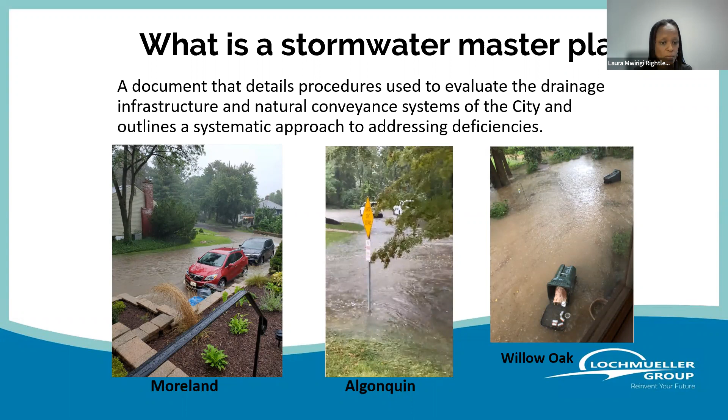So continuing what a stormwater master plan is, what does it actually do? One, it identifies the needs required to manage surface runoff, convey it through natural and built infrastructure, and discharge it safely back to the rivers and creeks. The city of Glendale is an MS4 as a core permittee with MSD. MS4 stands for Municipal Separate Storm Sewer System. That means that for the city of Glendale, the stormwater and the sanitary systems are separate.

Since the city of Glendale is a core permittee within MSD's NPDES permit, NPDES stands for National Pollutant Discharge Elimination System permit with the Department of Natural Resources, then there are some requirements that the city has to meet in order to remain a core permittee with MSD. This means that ultimately where the city discharges into a regulated system, discharge at that point is monitored to meet requirements of the Clean Water Act. MSD therefore cooperates with its core permittees to meet its requirements and manage stormwater runoff.

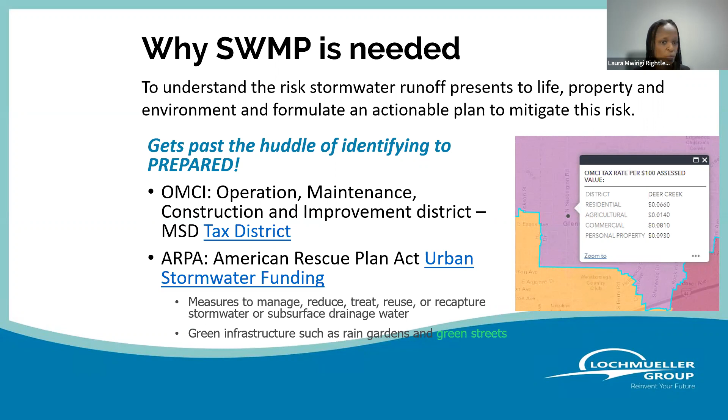We can move on now to questions. Do we have any questions, Alison? We do not have any questions at this time, Laura. Okay, all right then. In that case, we will move on to the stormwater master plan process.

This included Lochmueller developing a scope and fee, defining what the stormwater master plan would include, and submitting it to the MSD Deer Creek Watershed Committee for review. The Deer Creek Watershed Committee did approve the scope of work and fee, and that was presented to the MSD board. I believe it was introduced in June of 2021, and on July 8th of 2021, the board approved and allowed for an ordinance to be set up where the city of Glendale could enter into an agreement with MSD in order to be reimbursed for stormwater spending.

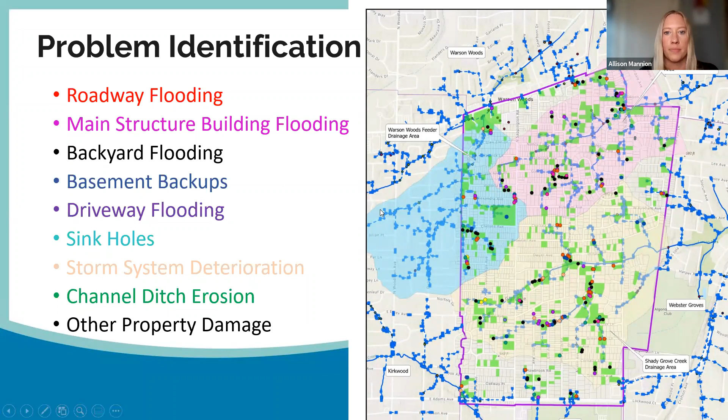So we were looking for roadway flooding, main structure building flooding, backyard flooding, basement backups, driveway flooding, sinkholes, storm system deterioration, channel ditch erosion, and other property damage. And like I said, the color of the text corresponds with the color of the data point in our map. And we were also out there taking some photos when we were out in the field as well. And I just want to go over some of the main problems we saw throughout the city. And the first one is roadway flooding.

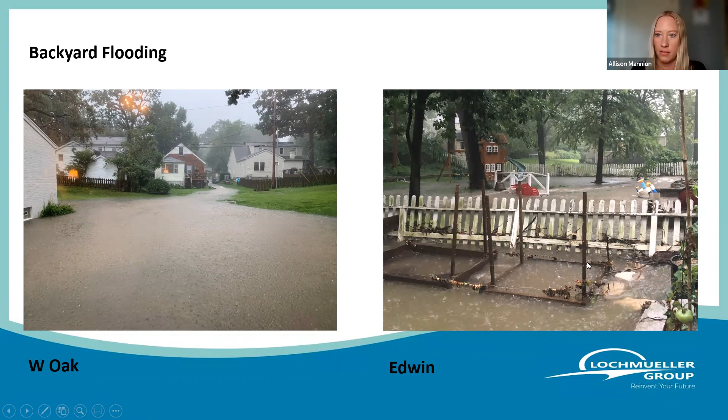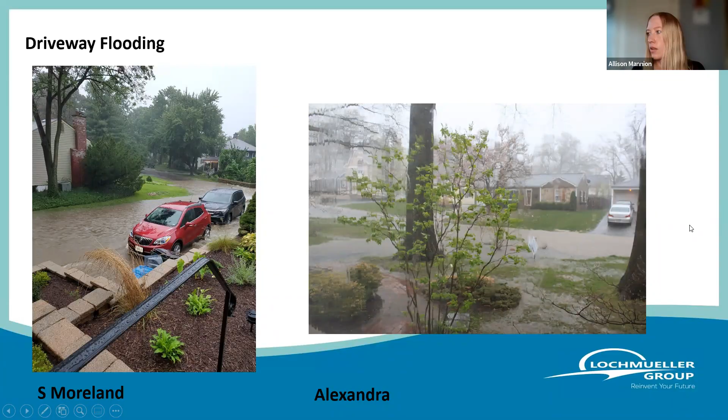Now we can take a quick break and do questions, and then I will start diving into the projects individually.

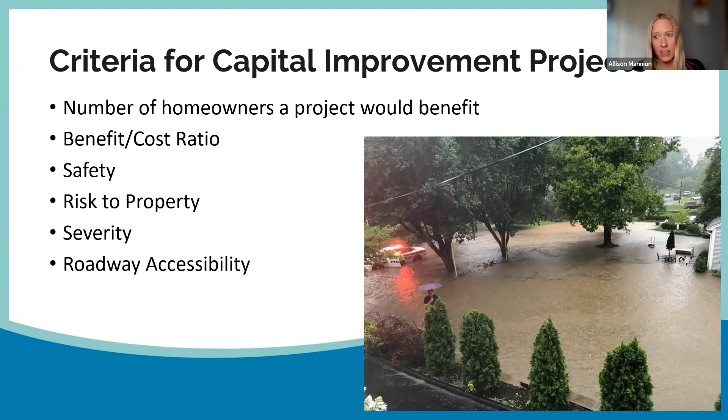So with these stormwater infrastructure projects, they're broken up into 3 types of projects, pretty much based on how MSD breaks up their projects. Those are improvement to the storm sewer collection system, storage, and stream bank stabilization. I'm going to now give you a little bit more information about what each one of these actually means. I'm going to start with the storm sewer collection system.

It could be open on 2, 3, or 4 sides, or it could be a graded inlet and flush with the ground. And the stormwater goes into the inlets, and then from there, those are the collectors, and then it's conveyed by the storm sewers in channels in the stormwater system. And improvements to the storm sewer collection system are needed in instances of flooding, of surcharged sewer system. So if there's not enough capacity in the sewer system to handle the stormwater, and roadway ponding if there's an insufficient collection in the area.

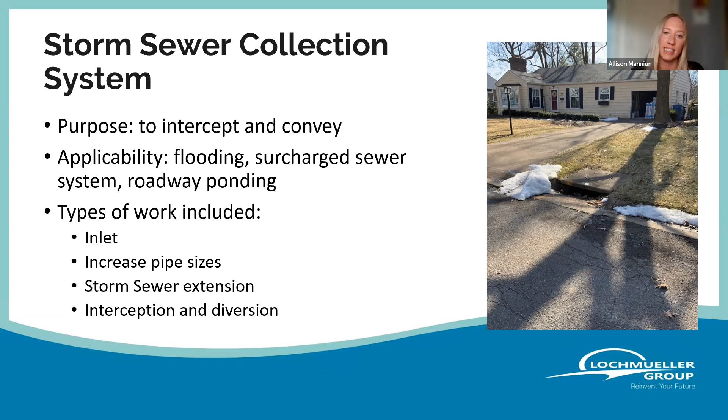And interception and diversion, and that would be used in an instance where the storm sewer in one area has less than sufficient capacity, and storm sewer in another area has additional capacity to take on stormwater, and so we would intercept and divert the stormwater from one area to another.

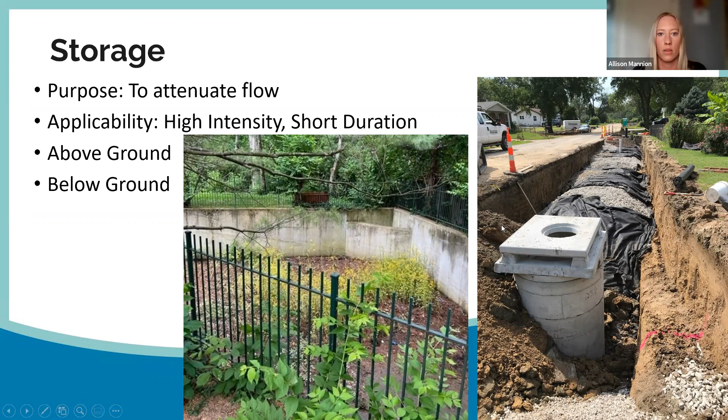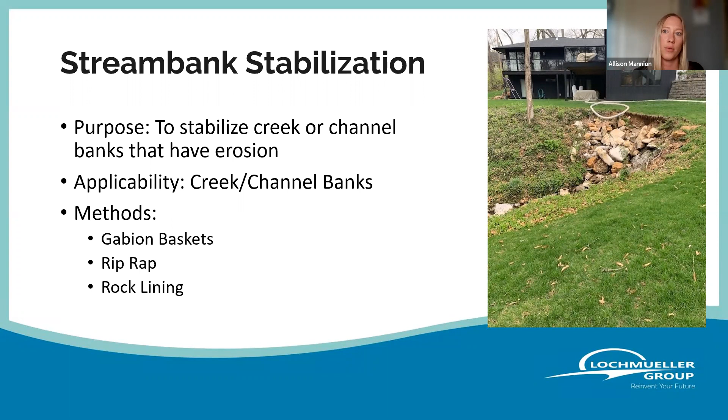And the last type of project is stream bank stabilization. And the purpose of these is to stabilize a creek or channel bank that has been eroding. And the methods of these include gabion baskets, riprap, rock lining. This photo shows an area within the city where this channel bank has eroded further and closer to the house structure. And so a main concern here is obviously the safety and property damage potentially caused by this eroding further towards the house structure or a road or something of that sort.

So now I'm going to start describing all of the projects. Before I do, I want to let you guys know that these are recommended projects. Right now, this is a draft phase of the Stormwater Master Plan. Nothing is finalized. Just because I discuss a project does not for sure mean it's going to happen. We are not done coming up with projects. And also some of these projects are shorter term projects, and they can be completed within a much shorter time period, and some are longer term projects. So those have maybe a bit more of a design component, or we will have to seek funding for that project. And to determine the opinions of probable cost for these projects, MSD pay items were used since this is MSD infrastructure.

And the projects were broken up into groups. The first tier, they meet all the CIP criteria and all the Stormwater Master Plan criteria discussed on previous slides. The second tier projects are considered for this master plan, but do not necessarily meet all of the criteria, but they do meet some. And projects that were not considered did not meet the Stormwater Master Plan criteria.

And here's a list of the first tier projects. They're not listed in any particular order, and I'm going to go over the projects in no particular order. These are not prioritized. They will be, but as part of the draft phase, we've not prioritized these projects yet. And these names probably don't mean that much to you. Again, we'll go over them shortly. And the second tier projects are listed on this slide. Again, in no particular order. And the project number at the end, that was just for our identification purpose. Again, that has no weight on the project.

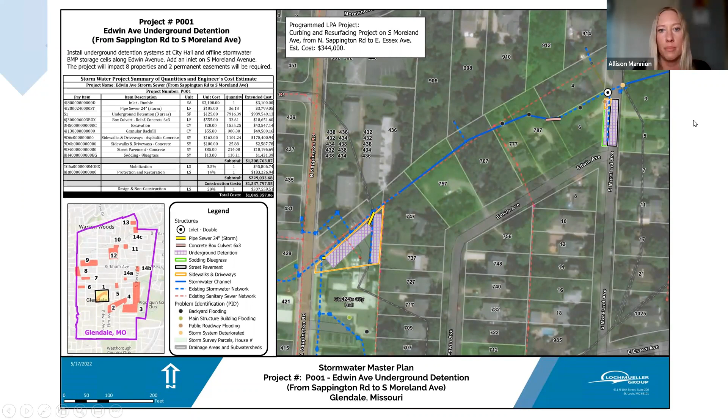The next project is Parkland, Elm, and Algonquin Stormwater Storage. This similarly recommends some underground storage along Parkland, Elm, and this paper street between Algonquin and Devon, as well as between a few of the houses on Parkland. This area from Cliffside through Algonquin, Devon, up to Parkland and Elm, all along this network of storm sewers, they are experiencing some flooding issues.

The stormwater storage will help store some of the stormwater. That will help that immediate area, and that will help downstream. So all of these areas of recommended storage are going to help this area and also further downstream by not overwhelming the stormwater system downstream. This project will benefit 217 properties and has an opinion of probable cost of $7.4 million.

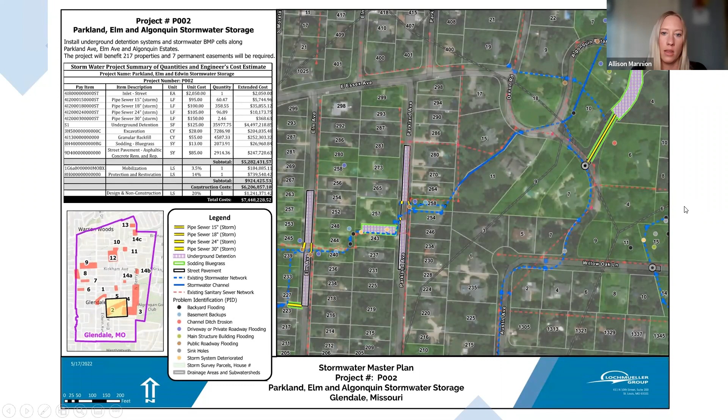The next project we are discussing is Willow Oak Diversion Sewer. Currently there is a network of storm sewers that goes south kind of parallel to Berry, and they end at a sinkhole between 15 Willow Oak Lane and 6 Kings Pond. This project is an interception and diversion project. So we are recommending to take the flow of the stormwater out of this system and take it down to Shady Grove Creek. Another option that might be considered during the design phase would be to take it over to the golf course and add to the storage pond, or look at another pond in the golf course. This project will benefit 33 properties and has an opinion of probable cost of $5.1 million.

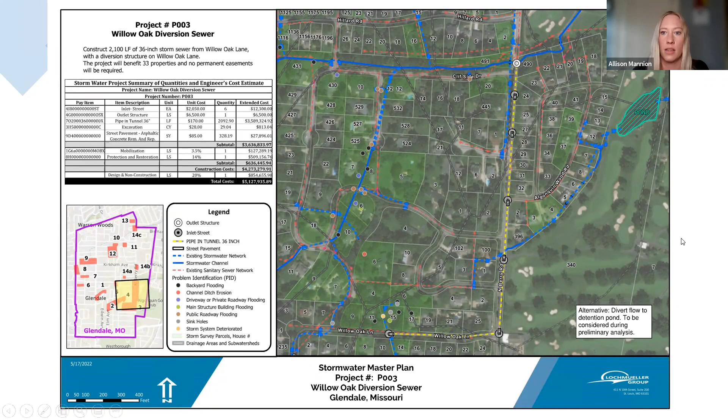Currently, the water from the stormwater going to that sinkhole flows underground through the karst and outlets in a stormwater channel at 6 Devon Road. That is the erosion photo I showed earlier of the creek bank erosion. So the Devon Road Creek Stabilization Project is using gabions in place to help stabilize that creek bank right there. This would be an example of a short-term project.

This channel is eroding closer to the house structure at 6 Devon Road. A longer-term project that would also help this area is the interception and diversion sewer along Willow Oak. This project would benefit one property and has a total cost of $10,700.

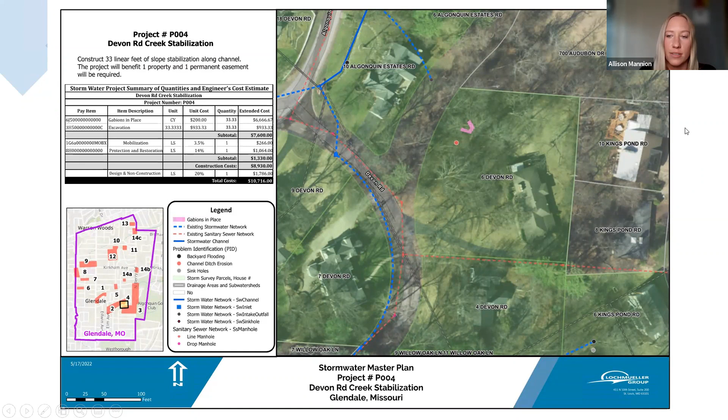The next project is Idlewild Lane Storm Sewer Relief. The area at Dwyer, Hillard, and Idlewild is flooding at this intersection, and some hydraulic analysis revealed that the storm sewer is undersized in this area. So it is recommended to increase the size of the storm sewer to a 30-inch storm sewer.

The yellow line shows the proposed storm sewer, and the shapes underneath it show either sodding or pavement replacement, in case you're seeing those in the exhibits, and those were used for cost estimating purposes. This project will benefit 57 properties and has a total cost of $72,000.

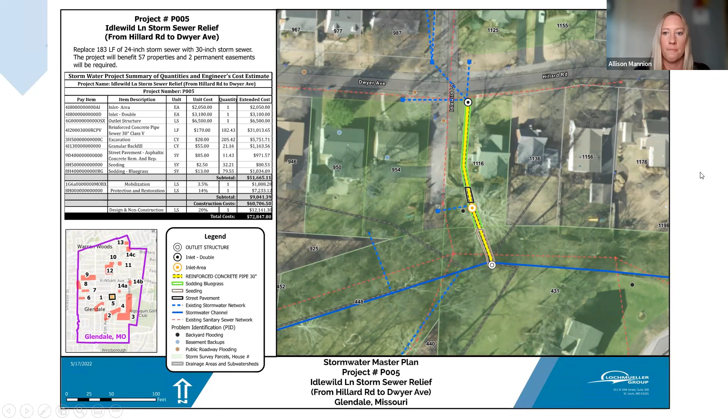The next three projects all kind of tie in together. This first one is Juanita Avenue Underground Storage. This is another underground storage project where it would go under the street along Juanita Avenue, and this would attenuate some of the flow. The storm sewer in this area is undersized, but in order to increase the size of the storm sewer, it would have to go a long ways north through the city of Glendale.

So another solution that we came up with would be to attenuate some of the flow, to temporarily store some of the flow out of the storm sewer. And again, this would benefit this area and the area downstream of this project. This project would benefit 27 properties and has a total opinion of probable cost of $929,000.

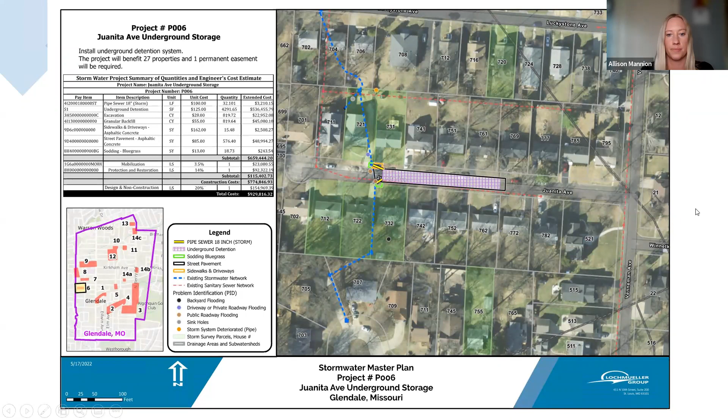This next project is very similar, Brownell Avenue Underground Storage. Again, they are seeing a lot of flooding in this street, as is Juanita, and the water is flowing over into driveways, into some house structures, into backyards. In order to help alleviate this problem, some underground storage is recommended.

This would benefit, again, this area as well as the downstream area by storing some of the stormwater and allowing the system to flow at capacity instead of over capacity. This project would benefit 20 properties and has a total cost of $1.9 million.

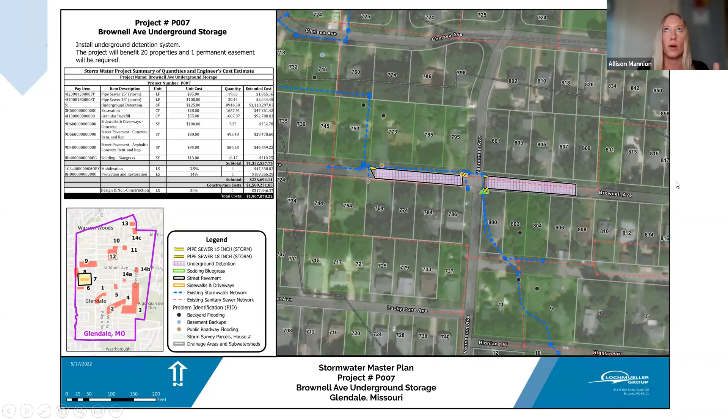Both the Juanita Avenue Underground Storage and Brownell Avenue Underground Storage will also help this area, which is downstream. This reach of storm sewer goes to Juanita, and this reach goes up to the Brownell Avenue Underground Storage project. Currently, the backyards along West Oak Drive are being flooded. This is where I showed a photo earlier, where there is an existing inlet that you could not even see because it was so flooded. The water was so high in the backyard that it was completely submerging the inlet.

So those two upstream projects would benefit this area, as well as this reach of storm sewer was found to be undersized, so it's recommended to increase this to a 42-inch storm sewer, as well as adding a few inlets. This is the West Oak Drive Storm Sewer Relief. This project would benefit 53 properties and has a total cost of $146,000.

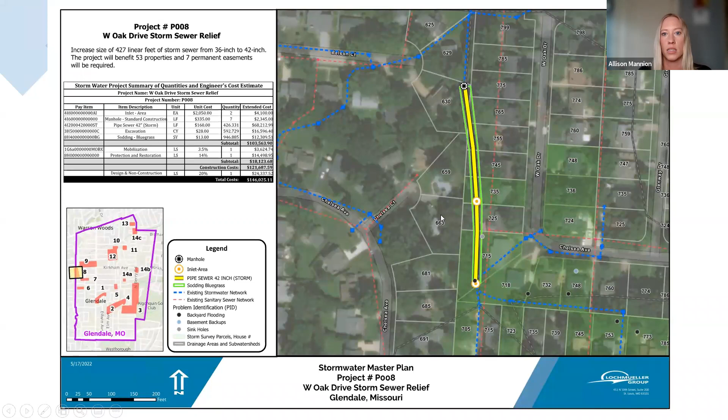Alexandra Avenue Storm Sewer from Sappington Road to Glenway Drive. Along Alexandra, there's currently no storm sewers as you go west, and there are none along this part of Sappington. So some stormwater from part of the elementary school parking lot and Sappington flows over into the structures of these first houses along Alexandra Avenue at Sappington. All the water from there is flowing down to in front of 815 Alexandra Avenue.

The amount of stormwater is overwhelming the inlets that are there right now. They just do not have sufficient capacity to take in all that stormwater. So it is recommended to do a storm sewer extension project and add some inlets in order to capture the stormwater earlier and convey it down Alexandra Avenue, instead of it all trying to be captured by, I believe, two inlets down along Alexandra. This project would benefit 35 properties and has a total opinion of probable cost of $443,000.

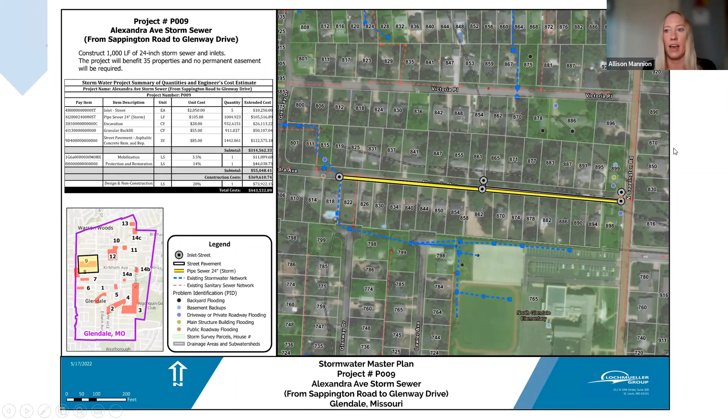This next project is an example of the above ground storage, which is a photo I showed earlier. This would, again, be to attenuate flow. That's what we're trying to do with all these storage projects. We're just trying to store some of the flow and release it back into the system when there is capacity, so not when it's pouring rain, but at a later time when there is availability in the storm sewer to take on that stormwater.

So this would be along Berrywood Drive. This is Berrywood West storage. This project would benefit 65 properties and has a total opinion of probable cost of $192,000. This would benefit this area and also the area downstream, which is getting pretty flooded during rain events.

And this next project, Berrywood East, is very similar. This would be an above ground storage project at 30 Berrywood Drive, which is a parcel owned by the trustees of the neighborhood. So it's not on an individual property. And this would help store some flow, help the downstream area that is getting flooded during rain events. And this project would benefit 63 properties and has a total cost of $147,000.

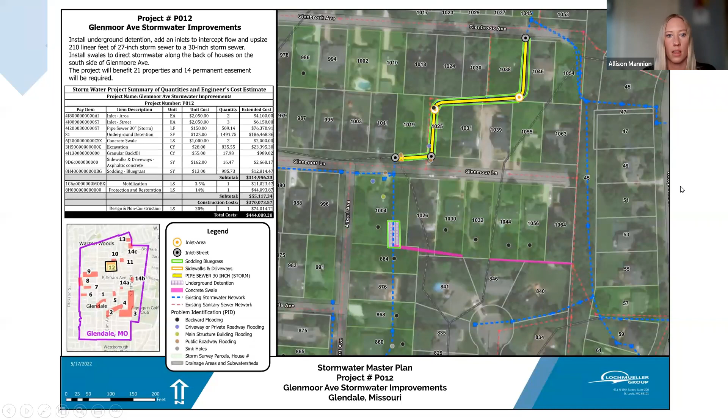Madison Avenue Storm Sewer Extension. There is currently a lot of backyard and main structure flooding along the houses right here along North Berry Road. So this would be to extend the storm sewer and add an additional inlet to capture the flow that's running down between these houses along Monier Place and the water coming down from Manchester Road. This project would benefit 4 properties and has a total cost of $20,000.

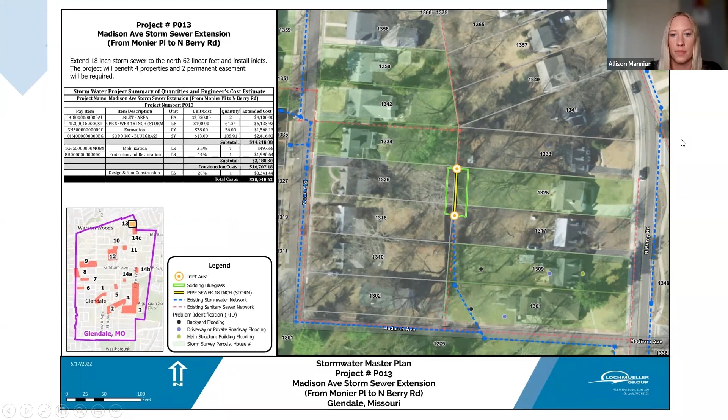This last project, we actually grouped a few different projects together because they were so small. The first one is along Brownell Avenue. There are currently inlets along Brownell Avenue, but they're just single inlets, and based on the amount of stormwater they're capturing in this location, they need to be double inlets. And so that improvement is recommended there, so the street does not flood.

The next area is along Glen Vista Place, and there are storm sewer improvements recommended, as well as the addition of an inlet to capture the stormwater that is not being sufficiently captured along Berry, as well as some curbing to help direct the stormwater to the inlets instead of flowing down the driveways in the backyards of the houses along Glen Vista.

And the last part of this project is at Berry Oaks Drive and North Berry Road. There was a paving project, and the 2 inlets at that intersection were not raised, so it's recommended that those inlets be raised to capture the stormwater as efficiently as possible, as well as some curbing added to direct the stormwater into the inlet and keep it out of the backyard of 1201 North Berry. These projects altogether would benefit 45 properties and have a total opinion of probable cost of $93,000.

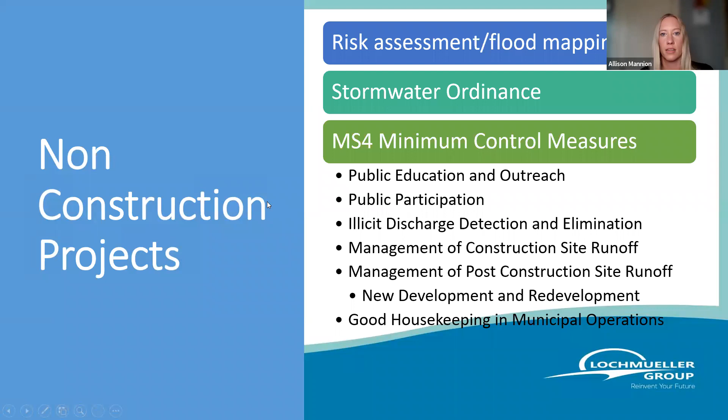And the reason those don't continue on into Glendale is because the square miles of Glendale is too small to trigger the FEMA flood mapping. So it's recommended that the city complete a risk assessment and flood mapping to see where we might have some problems along the creeks through Glendale and where there could potentially be future problems.

And I touched on this a little bit earlier, but the short-term versus long-term projects. Some of these short-term projects like maintenance or the smaller projects like adding an inlet, those are going to be a lot easier to complete. Those have a lot less of a design component. Those can be completed in the shorter term versus the long-term projects.

A lot of them I went over are going to be pretty expensive. We are going to seek some funding on some of these projects. These are going to be a little more permanent projects, and they will more than likely have a significant design component. So the project is just going to take longer to actually be completed.

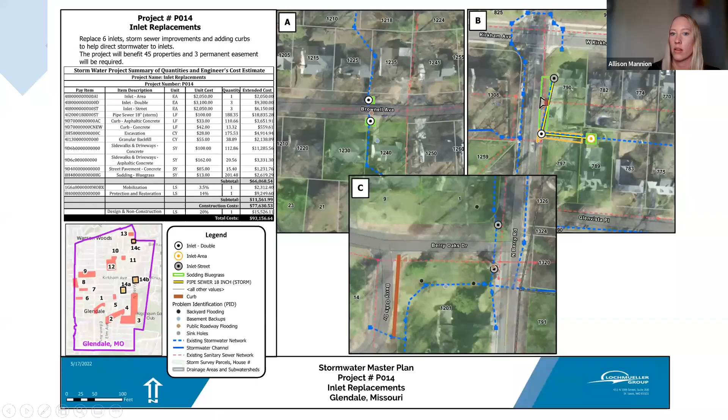Yeah, along Frederick, there are a couple upstream projects that have storage that will help attenuate the flow. It's probably gonna make a lot of people dizzy. There are Berrywood West storage and Berrywood East storage. Both are just upstream of Frederick, and so those will help store some of the stormwater in this area and release it back into the system when there's some capacity to take on this stormwater. So

I mentioned a few times throughout this presentation that the storage projects benefit that immediate area, but they also benefit the area downstream of the storage as well.

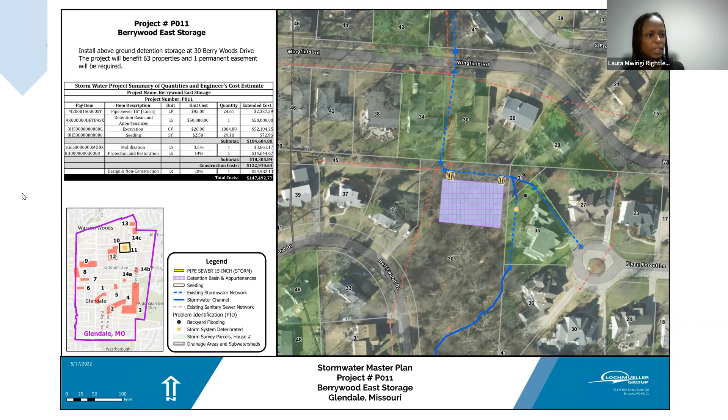There's a question that came up on the chat. I live on Glenbrook Avenue near an inlet. How does this project affect the inlet in my yard? So because this is very specific for that property, we can follow up and address that specific question. Yes, I believe that was Amy who asked that.